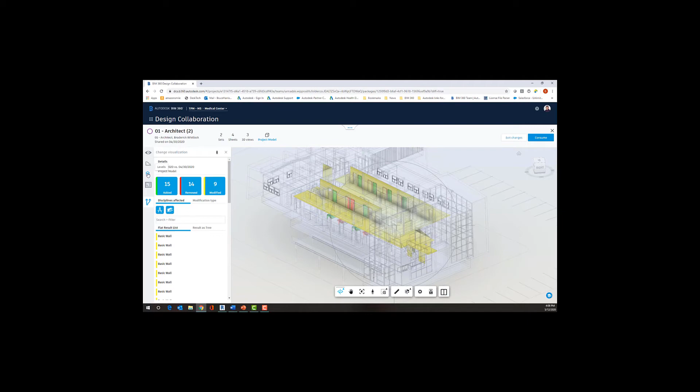So I can orbit around and take a look at it in a complete 3D model, or maybe I just want to concentrate on what's going on the ground floor. So I can go over here and say in levels, let's just take a look at what's going on in the ground floor. So now I can eliminate the floors above and below and only see the floor that I'm interested in. So you can view this by levels.

You can also go over here and view it by phases if it was a phased project. So there are many ways to view those changes and for those changes to be communicated between the design team. Once I've looked at these changes and I have decided that yes, this model, I need to go ahead and use this model. There are enough changes and they affect me and my MEP design enough that I need to go ahead and bring in this latest version of the model.

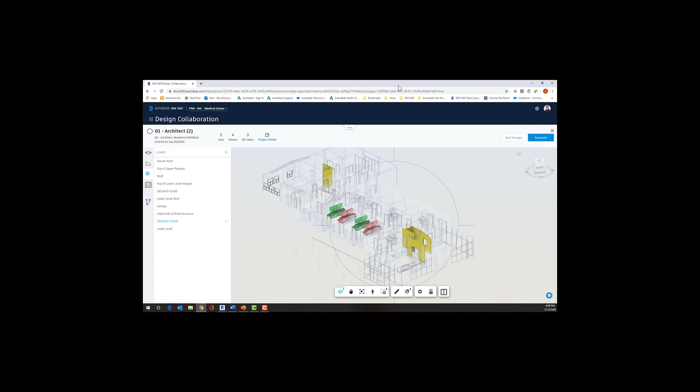So I'm going to go over here to consume. And then when I select consume, it's going to bring in that new architect's model to my environment. Now I'm going to change from design collaboration to the document management view in my web browser, and opening up my MEP folder, going into the consumed folder and the architectural folder there, you'll notice it has versioned the file. So now I am working with version 2 of the architect's file.

Now all versions of files are maintained in the system and we can go back to different versions. In fact, we can even compare them in this view as well as the view that you saw. Now let's go back into Revit. So now as you can see, we're several weeks into the project and a lot of work has taken place in this project.

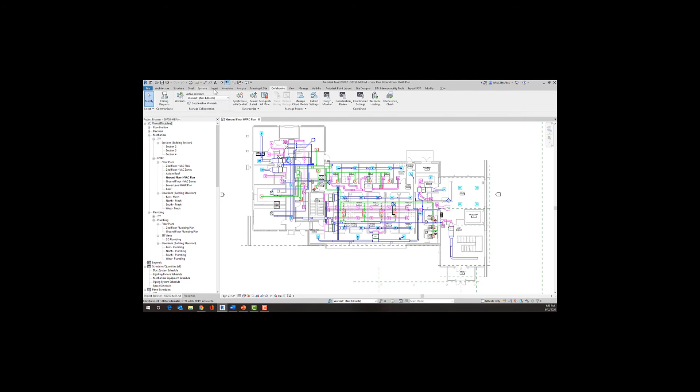Now, if I go to the Insert tab of the ribbon and go to my Manage Links, I can go reload and receive all those updates from the new version of the architect's file. We just saw that when we're notified via email that there's a new model, how easy it is to compare the model and in a graphic way see those differences between the old and the new version of the model, thus greatly enhancing the communication between our design team.

Next, we're going to look at other tools we have to collaborate between project stakeholders. We're going to explore our markup capabilities and our issue capabilities, which will allow us to have an email trail to track issues that we've created in the project. We're also going to look at the data-rich environment that the cloud gives us.

Now we're over in the document management view of the web browser, and we're going to go into that particular MEP model that we've been working with. Now when I double click on it, it opens up in a view. Now this view, or in fact all the views that we're going to be looking at in this section are available for project stakeholders whether or not they have Revit. So all of this is available to all the people whether or not they have Revit.

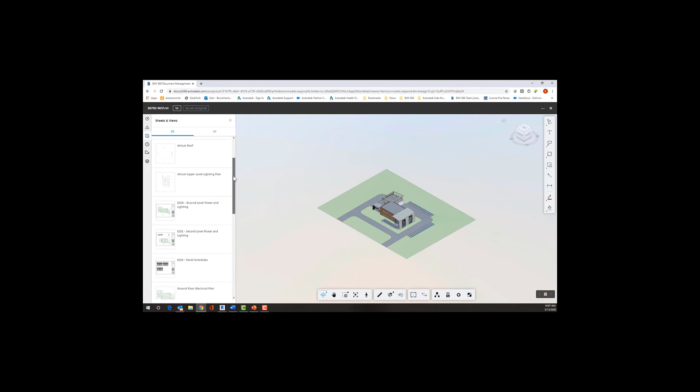Now the views over here in this section, both the 3D views and the 2D views, these views are made available, so you choose what views you want to make available, and those are in the publish settings that you saw Broderick do in our first webinar. Now I'm going to drill down to the ground floor electrical plan. So here we go, ground floor electrical plan.

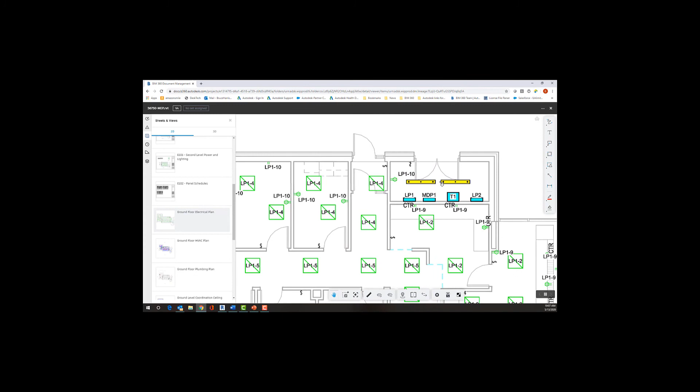And I'm going to zoom into my electrical room up here, and I realize there's a problem. So what I need to do is I need to communicate this problem with other team members. Now I could choose to do it in a couple of different ways. The first way I'm going to do it is I'm going to go up here and create a call out, and the kind of call out I'm going to create is a cloud call out.

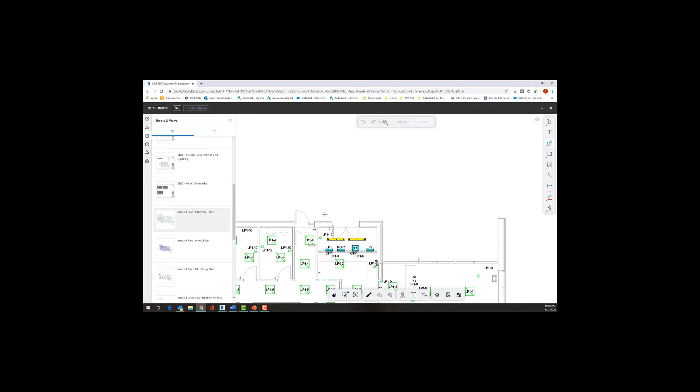So I'm now going to cloud this area and put a spot where I want my text, and then put in my text and save my markup. So now I've created a markup of this area. Now the markup is a wonderful way of communicating, but it would be really nice if we had an email trail to show that somebody's actually received the information they need, who's responsible for fixing this, and we could even assign time frames, and we do all of that through something called issues.

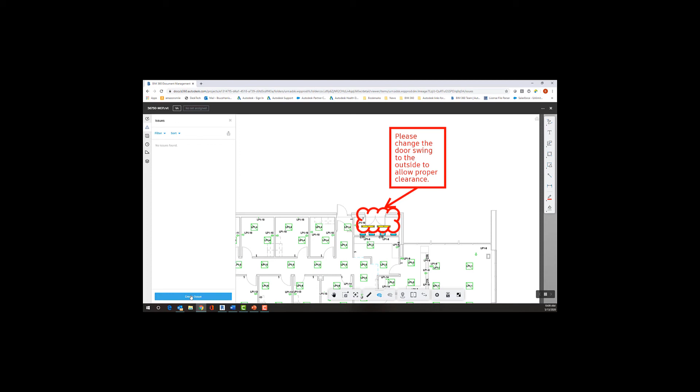So over here in our section on the left is issues. So I'm going to select issues. I'm going to create a new issue, and I'm going to drop basically a push pin out there for the new issue. It's a design issue. It's open because nobody has addressed it yet. I'm going to call this one door swing.

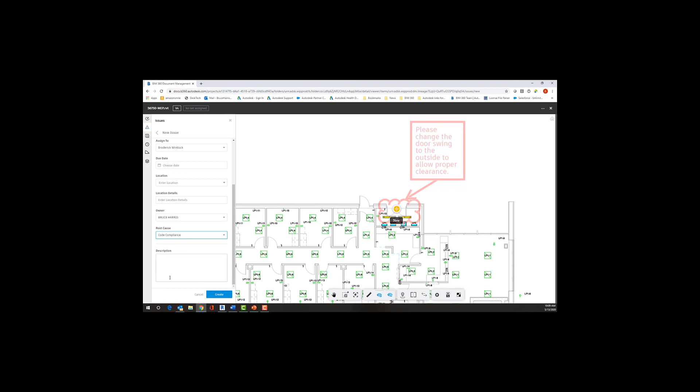I'm going to assign this to Broderick, our architect for this project. I won't put in a particular due date, just inform him of it. Our building isn't set up into locations like wings, so I'll go down to the root cause, which is a code compliance issue because we don't have the clearance we need. I'll put that same description in here and create an issue.

By creating this issue, I am emailing Broderick that this issue exists. He'll be able to select that and it will take him right to this push pin where he can see the issue. That's just one of our robust ways to communicate with project stakeholders.

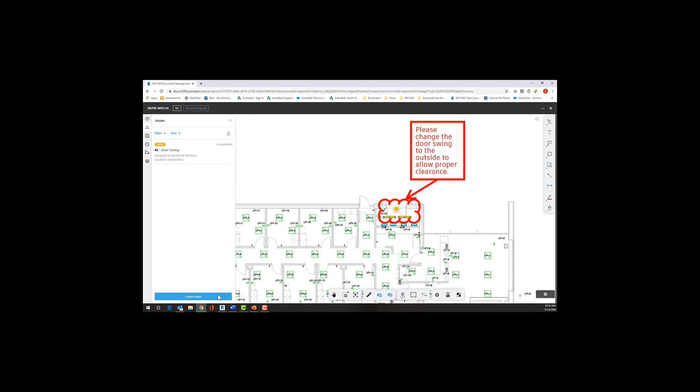Now let me go back to looking at my sheets and views here, and let's go down to the ground floor HVAC view. In here I can see all kinds of different pieces of equipment. When I select one, I can go to its properties, and I have the properties that this object has out of Revit. Let me make that a little longer so I can see all the different electrical classifications—apparently it hasn't got a load associated with it.

We've got all the different information that is available in the Revit object available to all project stakeholders, whether they have Revit or not. This is an incredibly powerful tool that lets us get down to the data contained within these objects.

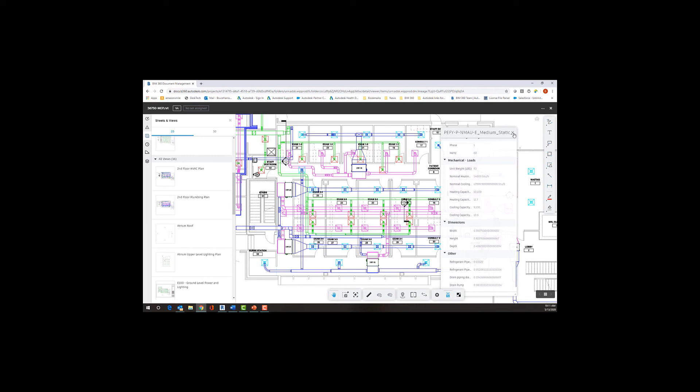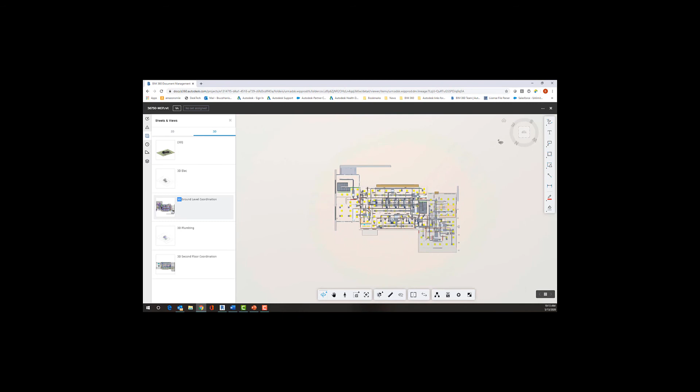Now we have multiple ways of getting to this data, so let's take a look at another method of looking at the robust data kept inside this model. I'm going to close down properties for a moment and switch to our 3D views, and go to my ground level coordination view. Now I can look at it from any point of view—this is the model isolated for the ground floor.

I want to take a look at it from a particular type of object point of view, so I'm going to come down here and look at our model browser. When I select my model browser, it brings up another window and categorizes the objects by the object type they are in Revit.

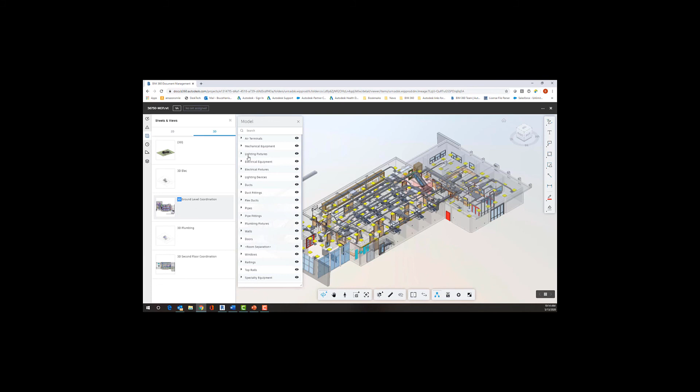So if I want to isolate my lighting fixtures, I can isolate my lighting fixtures, my electrical equipment. In my case, I want to go up to my mechanical equipment, and I can even expand it out and go down to a particular type or piece of equipment. I can see all of this particular kind of equipment, or maybe these. It gives you a very robust methodology to drill through the different object types that are in there.

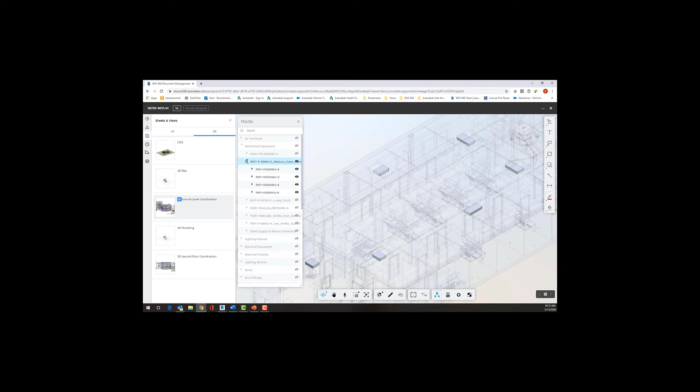We can even break it down into individual ones. I can select it and open back up my properties window, and I have all the properties of that particular object right here. As you can see, all of the wonderful data inside our BIM model is available to everybody in this environment, regardless of whether they have Revit or not.

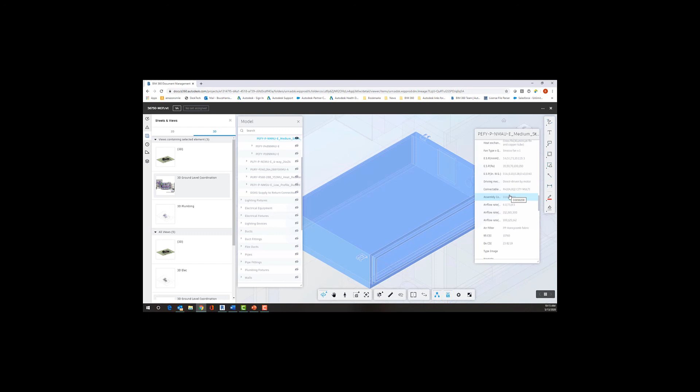So we've seen the robust power we have to collaborate with other project stakeholders, and also the incredible rich amount of data available to us in this cloud environment. We've seen how to create models, put our central model in the cloud, link in the architect's model, compare versions of models to enhance communication between project stakeholders, and the wonderful collaboration tools we have in both markups and issues, and the data-rich environment in the cloud.